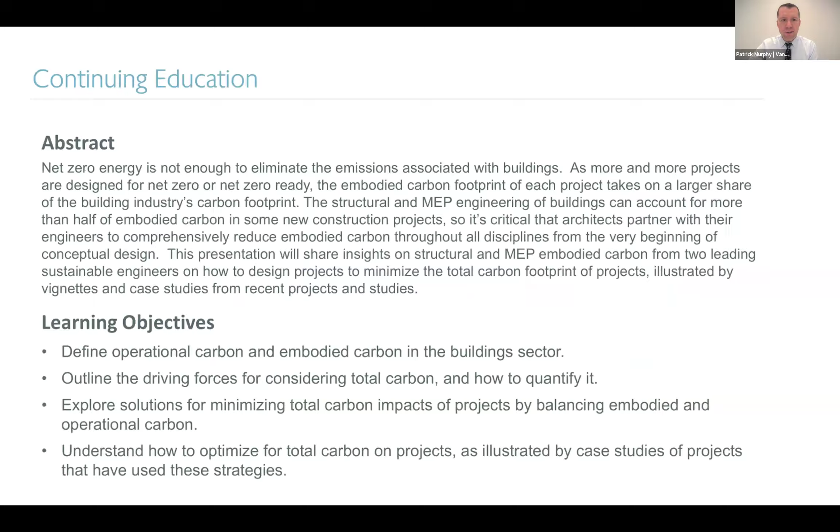Today we'll go through very briefly. We trust this audience is a well-informed group of people around carbon in the built environment, but we'll hit on some highlights, especially as it relates to the way that engineers think about it. Then we'll spend time going through case studies and peeling out lessons learned, both from Suzanne's practice and ours, and then also bringing that together in our collaborative work together. Then we'll leave you with some key takeaways for things you can be doing on your projects now to advance the practice.

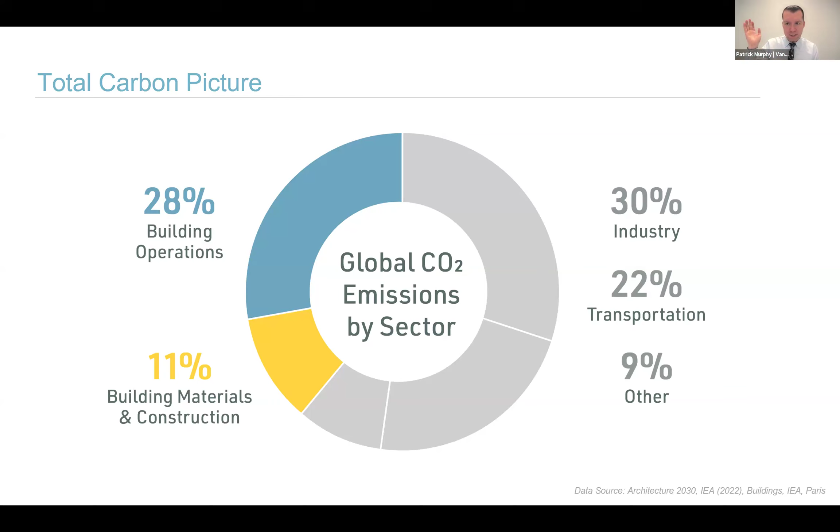So first, carbon in the built environment. It will surprise no one on this call that buildings are responsible for 40+% of global emissions, and of that we see about 3/4 of those emissions are associated with building operations, and about 1/4 are attributable to the construction process and the materials procurement and manufacturing process. What that tells us is when we're only renovating or building maybe 1 or 2% of the square footage in a city or the world any given year, there's a really disproportionate impact around the embodied carbon of projects compared

to the 20, 40, 60+ years of operation of those buildings. So when we're talking about the carbon footprint of a project, we really need to widen the aperture. We've spent many years, especially in Massachusetts, focusing on getting to net zero energy, getting to a real focus on operational carbon to zero. But when we look also at the embodied carbon of these buildings, we need to look at the totality of operational and embodied carbon for that total carbon footprint. Sometimes we may be investing more embodied carbon to save operational carbon, and we need to be looking at that in a really strategic way to make sure we're making the right choices on our projects.

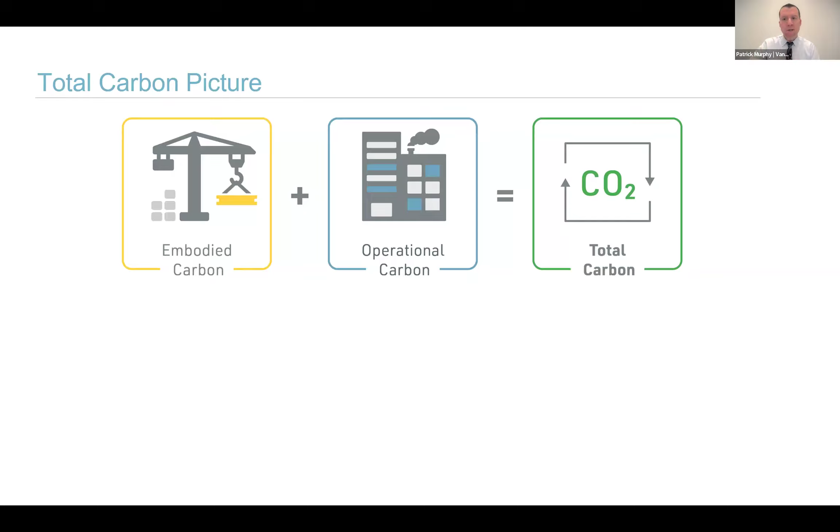It's similar to, I'm sure a lot of you have been through, projects with life cycle cost analyses, where you're investing more dollars upfront for, say, an energy savings measure, like triple pane glazing instead of double pane glazing, in order to save operational costs down the road. There's theoretically a payback for that upfront cost investment. The owner wants to see that they are seeing return on their money. You can think of a similar approach with carbon.

You're maybe investing more embodied carbon upfront to save operational carbon down the road. Is there a carbon payback? Is that carbon payback quick enough? The teaser I will say is every pound of carbon we are putting in the atmosphere right now is a big deal. So if your carbon payback is longer than a couple of years, it might not be worth it. The time value of carbon is a real big issue, but this is changing the way that we're thinking about total informed integrated design, and we're trying to move this to the beginning of projects to make informed design decisions while we still have that opportunity.

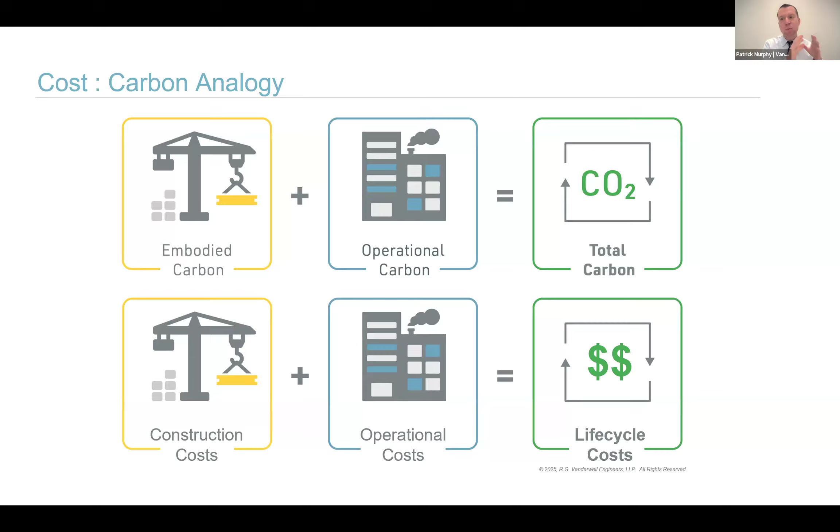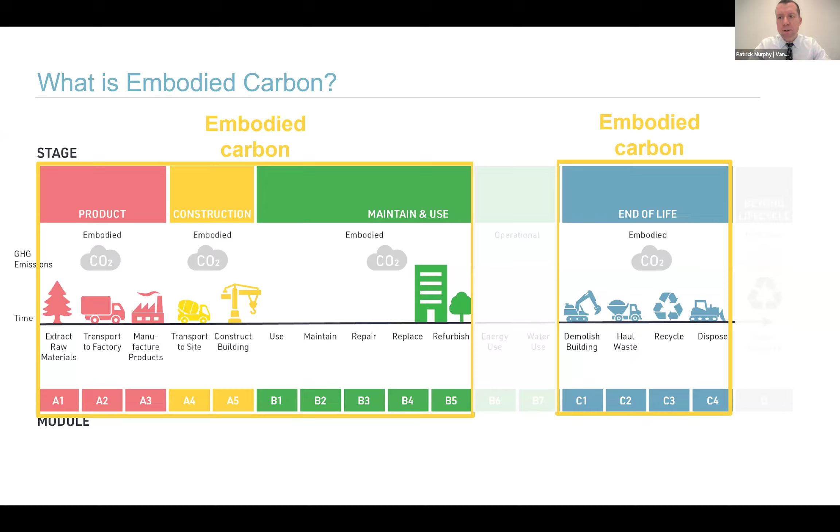So the total carbon life cycle of a project, you've seen the chart before. Embodied carbon covers most of the categories around this, and of that, roughly 90% of what we know about embodied carbon is really happening in the A1 through A3 categories, the material selection and transportation to the site, and also the construction in A4 and A5. Operational carbon is just like one or two relatively small slivers of this project, but it's still a quite large footprint of the total carbon footprint of the project.

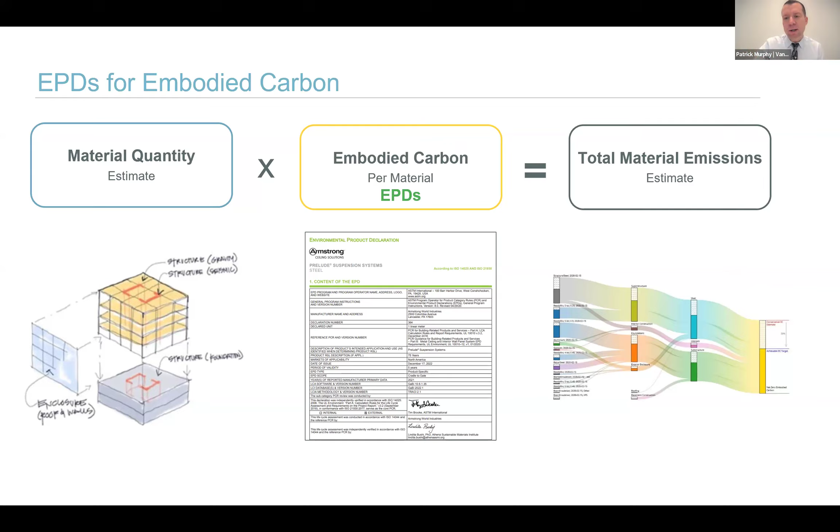The way that we get to these quantities is just like doing a cost estimate. So you'll see that cost and carbon analogy coming through, where you're doing a material quantity estimate and comparing that to the embodied carbon of that material. Many architectural materials fortunately have environmental product declarations. Speaking as an engineer, those are few and far between for us, so we have other methodologies to translate material quantities into the embodied carbon footprint of a material.

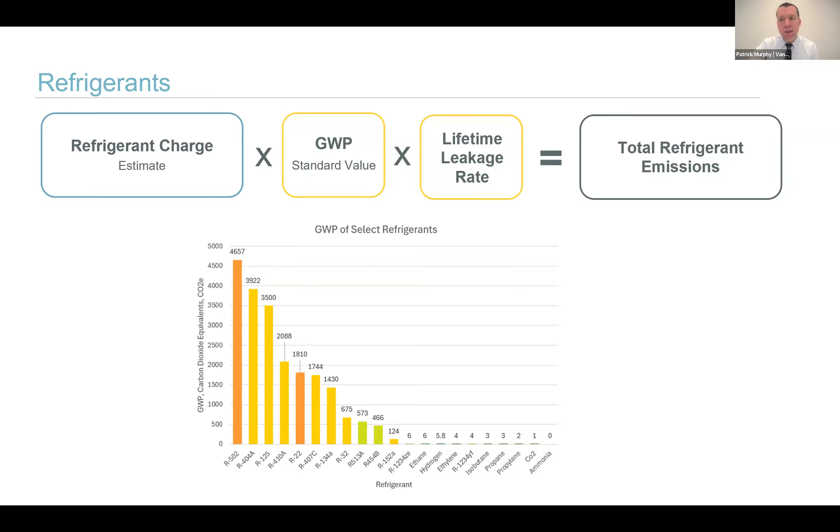Especially speaking as a mechanical engineer, the refrigerants we deploy in a lot of our heat pump systems, as part of our electrification strategies, have a disproportionate global warming impact equivalent to embodied carbon. The way we figure that out is the amount of refrigerant in the system multiplied by the global warming potential of that refrigerant. Global warming potential means if you were to release a pound of that refrigerant into the atmosphere, what's the equivalent of releasing CO2? Many refrigerants that are fortunately being phased out have the equivalent of thousands of pounds of CO2 emitted for every pound of refrigerant leaked. So how much leakage you have and the refrigerant selection are big deals. Thankfully we're seeing a phase out of these highest GWP refrigerants, but they're still a disproportionately high contributor to MEP embodied carbon.

When we think about the operational carbon footprint of a project, there are several components we need to look at simultaneously. There's the site combustion, the scope 1 emissions—are we burning a fuel in the building or at the site to heat the building, for example? A lot of our goals are to eliminate that altogether or as dramatically as possible. Then you have emissions associated with the electricity grid. It's a mixture of hydropower from Canada, offshore wind power, solar from down the block, but also the natural gas or coal burning power plant across town or across the state producing that electricity. There's a carbon footprint for every kWh you're consuming. You can deduct your clean power generated on site or procured directly offsite, as long as you're retaining those renewable energy credits, and that gets you your net operational emissions.

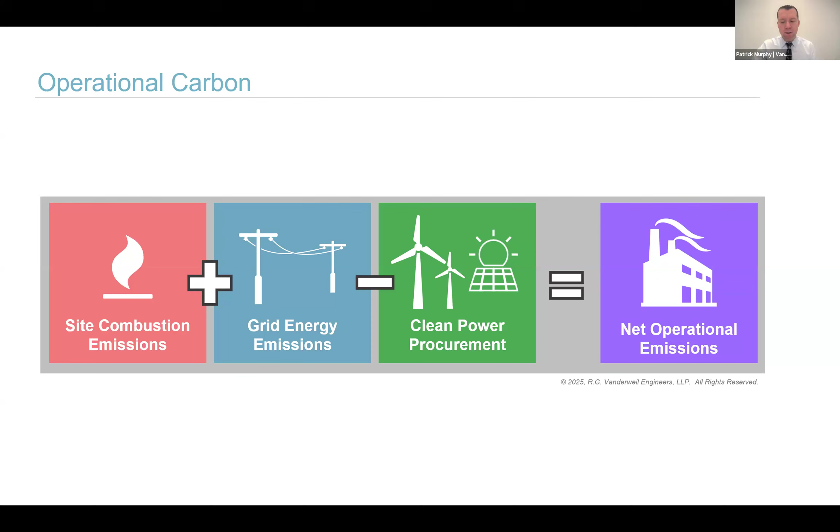I also think it's important to understand the why of why we're learning about embodied carbon, as this is becoming more of an entry point. In one of the presentations I did earlier this year, where we're educating more engineers across the field, some of them don't really have climate change on their radar, which is also sometimes the case with some of our audiences too. But it's important to know that it's coming—it's in our regulations, codes, the green building rating systems, and so on.

Often the embodied carbon policy shows up in two different formats. One is embodied carbon reporting—this is where we're measuring the LCA. Often we're just asked to report it; that's the entry point, and then later reducing it, usually around a baseline or potentially a benchmark. The easiest entry point is the Buy Clean program, similar to what we'd seen on the operational side with utility incentives for a high efficiency pump or other new technology. So this is where we're specifying lower carbon materials, often identified through EPDs. In Massachusetts, the Building Stretch Energy Code already has a quasi buy clean program with low GWP concrete incentivized in one of the compliance paths. Cambridge and Boston already have requirements for measuring the LCA, the embodied carbon reporting, for the structure and envelope, usually for buildings over 50,000 square feet.

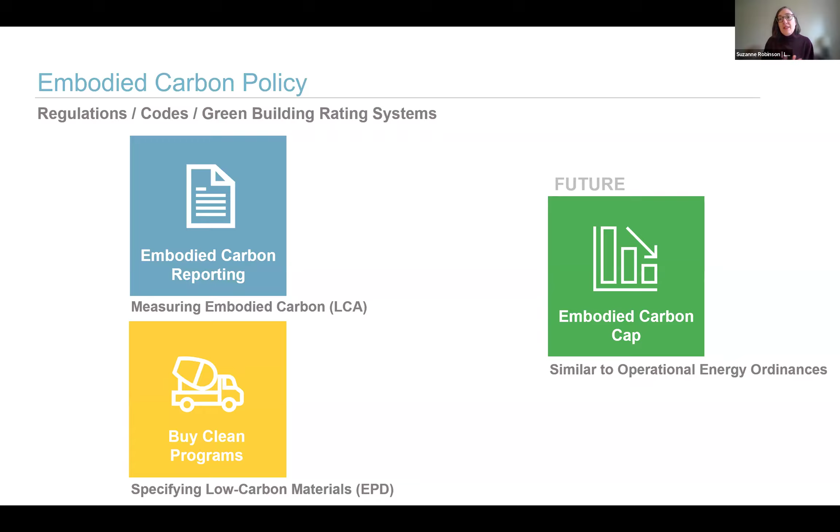On the horizon, we have the state. Massachusetts put together an embodied carbon intergovernmental coordinating council to make recommendations to integrate embodied carbon reductions into the state building code, so we'll potentially see some of that in the near future. I was involved in some low carbon concrete recommendations for buy clean programs, so we'll see what makes it to the entry point there. Eventually what we'll see in the future is embodied carbon caps. We're already starting to see some countries in Europe limit embodied carbon values, similar to what we've already experienced with operational carbon, with building energy ordinances that limit the amount of operational carbon a building can have. It's not a percent better anymore—it's just a cap.

So what we'll do is go through 4 case studies. I have 2 and Patrick has 2. We're very democratic in here.

Before I jump into that, I want to talk about embodied carbon reductions for structural opportunities. The engineer in me likes to think in buckets. As we saw in the earlier slide, material quantity times the environmental impact of a material gives you that embodied carbon.

So two strategies on the material quantity side: we want to reduce material quantities. That can be done through what the architect designs and also through decisions the structural engineer makes in their design work.

The other two buckets are about material selection. You can either specify a lower carbon material—often by improving materials already in use, such as lower carbon concrete or lower carbon steel—or use alternative building materials, designing with non-conventional materials that have been around for quite a while, usually bio-based materials like mass timber, which I'll talk about.

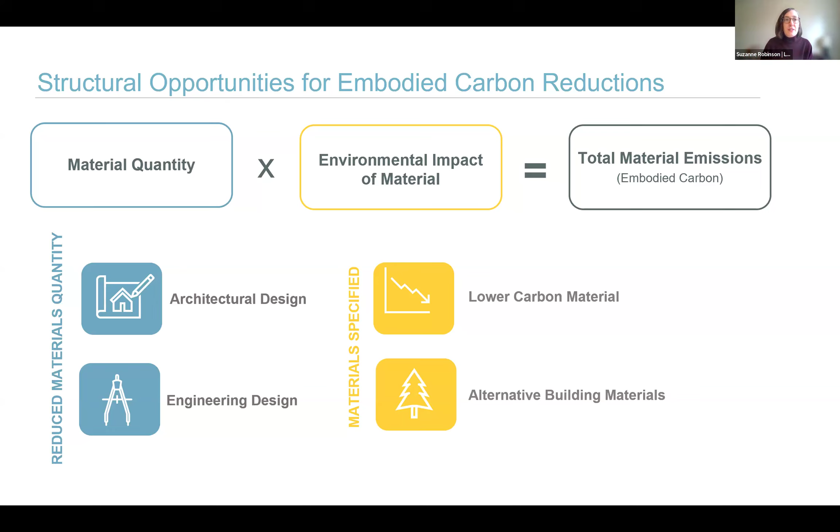Jumping into the first case study, this is the Duan Family Center for Computing and Data Sciences at Boston University.

This project was awarded to KPMB way back in 2013. I'm noting the date because embodied carbon wasn't really on our radar back then, over a decade ago, like it is today.

In 2017, BU's Climate Action Plan went into effect, and the first 3 goals in that are: prepare for climate change, net zero direct emissions by 2040, and act on indirect emissions—so embodied carbon.

In 2018, after the project was put on hold, the design team was asked to meet these goals as best we could, mainly focused on being a very monumental fossil fuel-free building.

The project team was also asked in 2019 to bump up to LEED Platinum. It was an interesting exercise because that's when the team had to go back to the drawing board and look at more credits to reach Platinum.

There was a whole process of looking at the building life cycle impact reduction credit, which was explored, and through that we reviewed the concrete design.

We were able to develop several strategies, some of which included increasing the SCM, the supplementary cementitious material. This was back when GWP wasn't as much in the forefront for this.

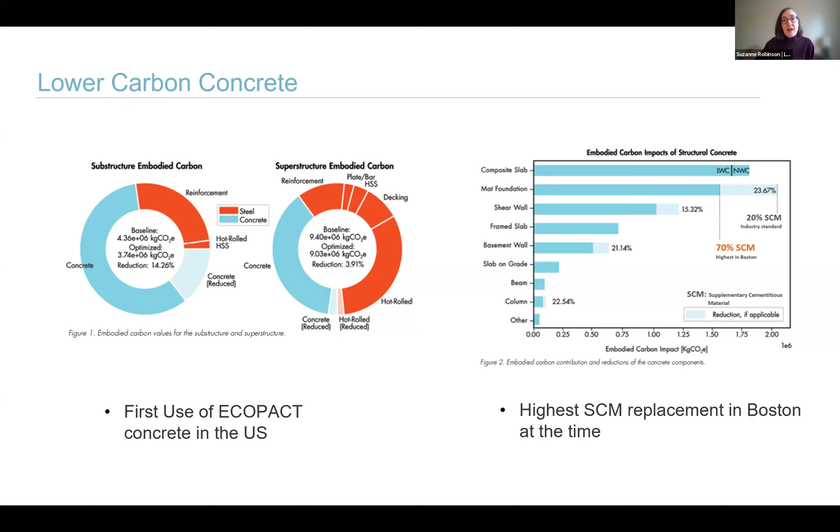Before the next case study, I wanted to touch on a concept: gravity path, which architects have all taken in structures classes—often an early class for most programs, so hard to digest all of it. But one really important thing is understanding that the simplest gravity path has structural columns all aligning and going straight down, bringing the load straight down to the foundation, nice and simple.

That's the least amount of material. Anytime the gravity path has to travel farther—usually through cantilevers or column transfers—we end up needing a lot more material to support that path.

This project, the data center, is a great example of a building form expressed through cantilevers and open spaces, which required column transfers. On the base level was a vertical piazza staircase for congregating that needed a wide open space, so we ended up with a lot more embodied carbon as a result.

I mention this to share that although it's beautiful, it's a design form from an earlier era. Now that we're more aware of embodied carbon in structure, this was back when that wasn't such a significant factor in the sustainable design approach.

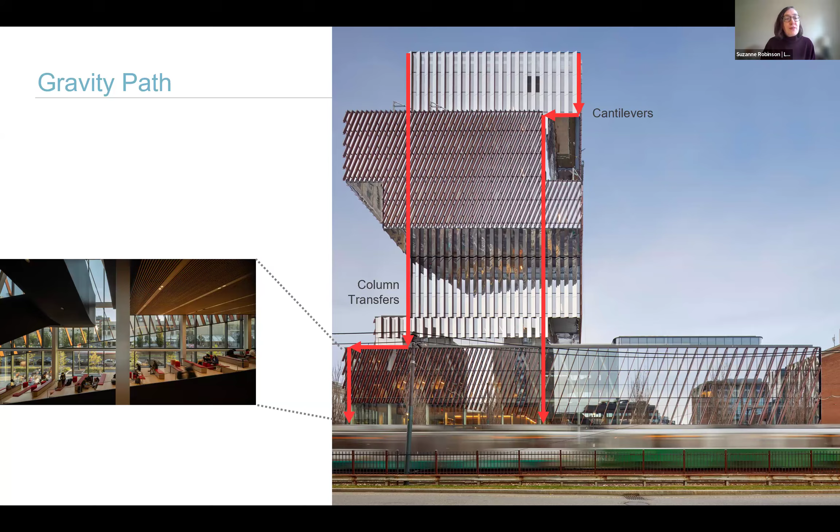For the next project, the Pardee School of Global Studies is a great example because it shows the evolution of how to design buildings that push limits, not just in operational carbon but also embodied carbon, moving towards meeting Boston University's evolving climate goals.

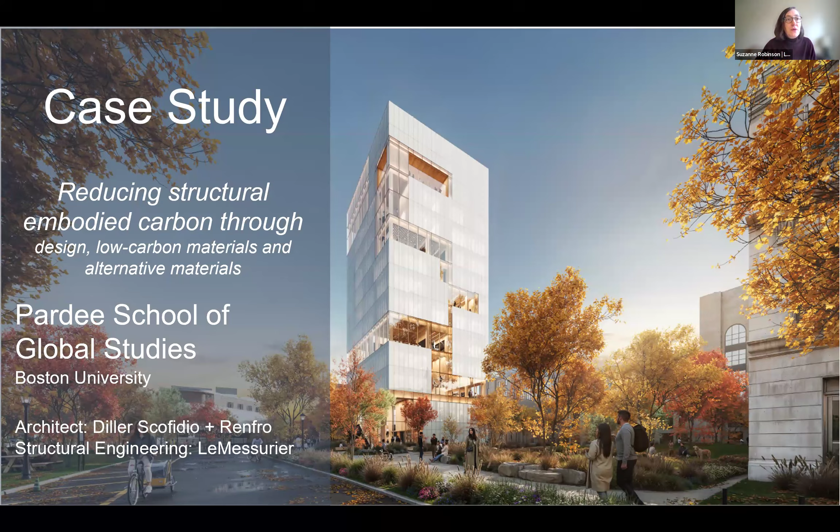This project went through several design iterations. It was designed partly through the COVID pandemic, and as prices drastically increased due to material shortages, we had to redesign as a team while maintaining the integrity of the vision, still keeping those internal neighborhoods that were part of the design vision and the concrete core.

What's interesting is this project didn't start with the structural materials it ended up with. It started with structural steel mega corner columns. As we simplified the design to meet budget, we introduced a new material, finding a new way to express the design vision through mass timber. I always recommend if you're going to design with mass timber, start with it, don't introduce it partway through. This was an integrated design approach, holistically finding something to meet the vision while meeting all other requirements.

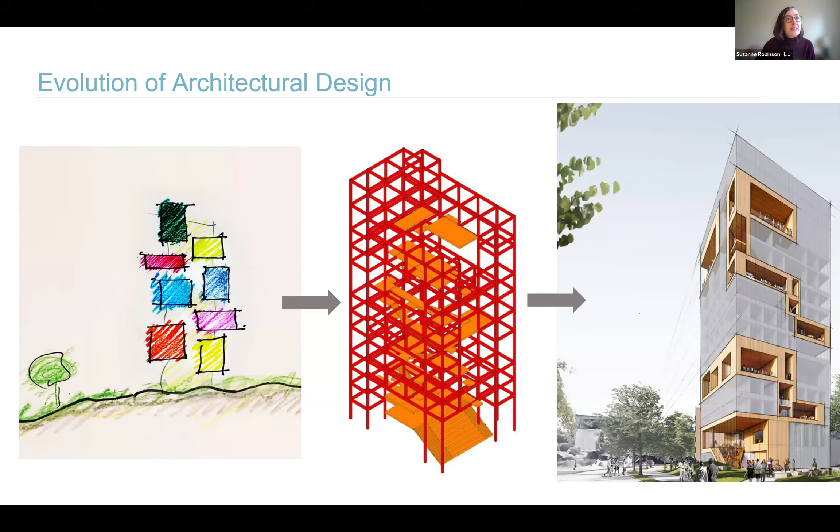Looking at the initial design, we were only hitting about a 2% reduction in embodied carbon for the structure. This was partly because we didn't have as much concrete in this building as we did with the data center, due to the project's design.

By adding mass timber as an option along with lower carbon concrete, we get a 31% reduction. Often people are surprised, they think that percentage should be a lot larger.

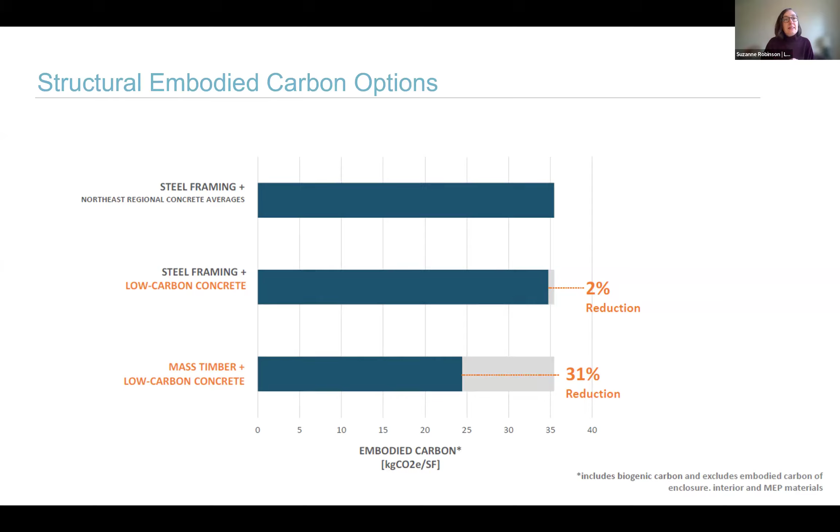My last point for this case study: if you take away foundations and only look at the superstructure, you're actually seeing a 54% reduction. So you're really starting to see mass timber pulling its weight with embodied carbon.

If you just look at the gravity system, which the mass timber is, it's an 87% reduction. But it's really important not to separate gravity system to gravity system, one-for-one comparison, because you can't do that. You need to be holistic.

For instance, when comparing material differences, steel to mass timber, in our LCA we include the acoustic buildup needed to meet acoustic requirements for mass timber, which we didn't necessarily need in our previous design with concrete, which inherently has better acoustic performance.

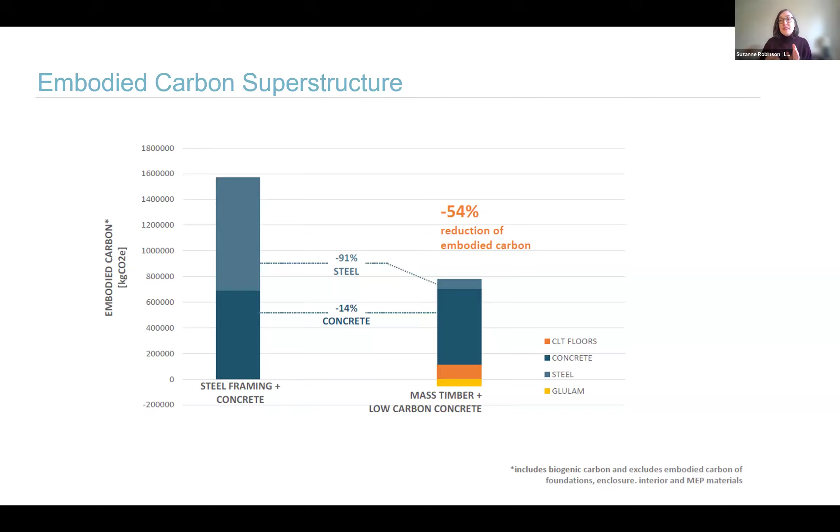Another example is facades. Often people try to choose the lowest embodied carbon facade system without considering the structural system that has to support it - the weight of the facade, the tolerance of deflection. Those can really bump up the structural system's carbon. We need to look holistically, everybody's part of the design as we figure out embodied carbon.

I have 10 seconds, so I'll add one last thing - not structural, but a great story. Because we simplified the facade system in this iterative design process, we were able to afford a triple glazed enclosure system, whereas before, when the enclosure was more expressive on the facade treatment, we couldn't afford triple glazing. So it's about figuring out which design moments to prioritize and where to spend the financial budget and the carbon budget.

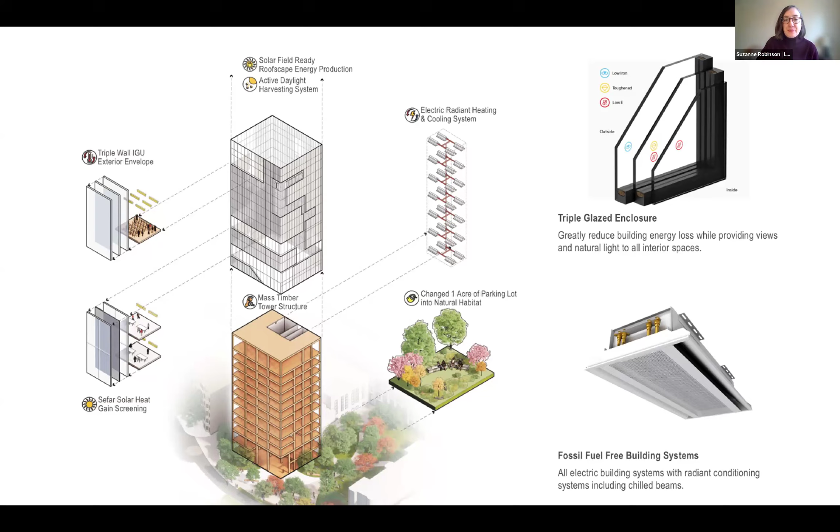Our next case study was the recladding of Gund Hall, the Graduate School of Design at Harvard University, where we partnered with Bruner/Cott as the energy consultants, and MEP, to understand what the implications of different envelope strategies would be on the overall project.

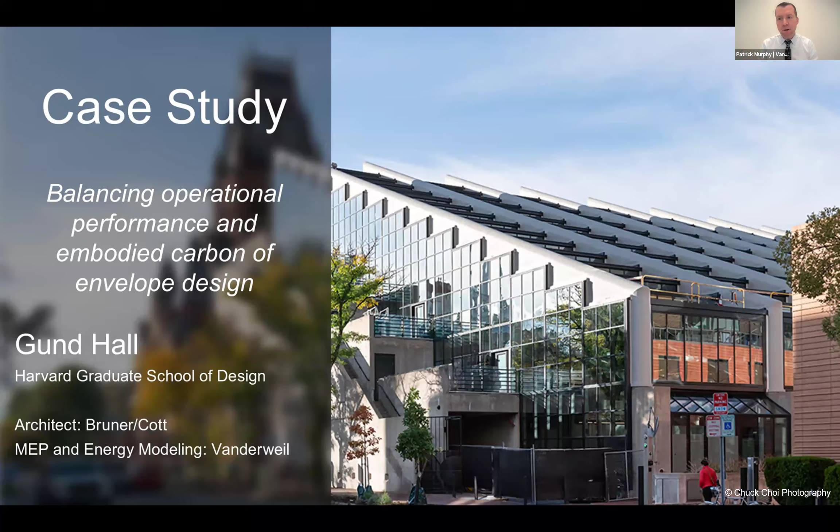We were helping in an initial study to scope the project and then track performance throughout design and construction, to ultimately address environmental issues with leaking roofs and daylight issues in the space, but also reduce the energy and operational carbon footprint in alignment with Harvard's goals.

The scope of the project ended up utilizing a hybrid VIG, new curtain wall system and glazing for the studio space, compared to the existing structure, which is a large concrete brutalist, early brutalist structure. The scope of our project was a small percentage of the overall embodied carbon of the project. This was not to say that we would have ever demolished and rebuilt the building, but where we're finding value in these historic structures.

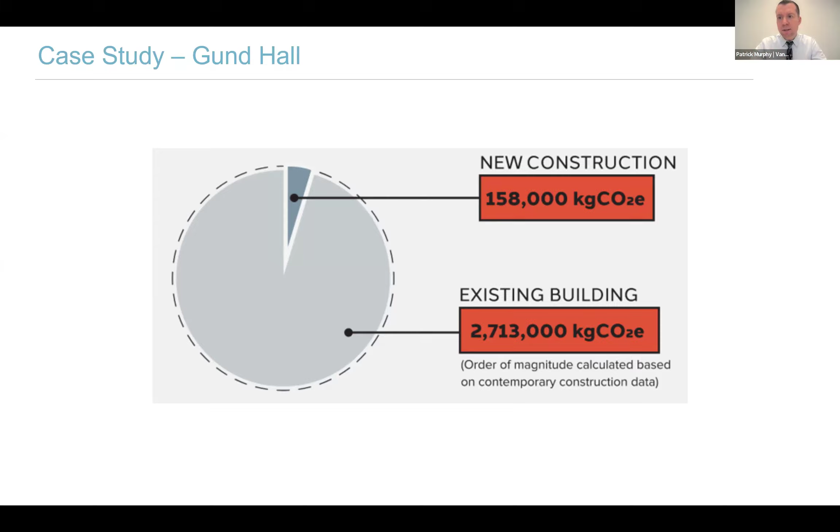We're trying to make them adaptive to the current approaches to design, both in terms of operational performance, but also now in terms of investing our carbon wisely. We wanted to understand what that scope was. So we invested about 160 metric tons of CO2 in embodied carbon in a new facade system for the studio.

We compared that to the operational savings of the different options we considered. Initially, when this project started in the study phase, this was prior to the Massachusetts Stretch Code updates, prior even to the drafting of the Massachusetts Stretch Code back in 2022 and 2023. Initially, the goal was to use a high performance but still double pane glazing system.

When the Massachusetts stretch codes came out, this project would now be subject to the stretch code, which used to not include existing buildings. Then in 2023, it did apply to existing buildings, and we had to demonstrate compliance prescriptively with that new code. The performance values for the facade were about 20% more stringent than the previous version of the code.

That tilted us towards maybe triple pane, or we looked at this hybrid VIG system as well. We also looked at applying insulation in other places, and a couple of other strategies, including improvement in lighting and lighting controls, to get overall performance of about 25% reduction in operational emissions.

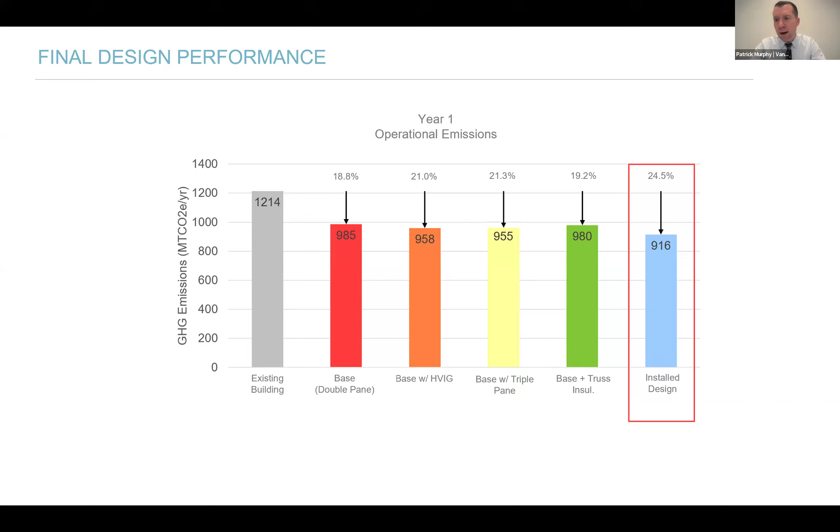That's compared to 3 years of meter data. We calibrated an energy model, so we're really trying to be accurate to the real world operation of this building. So we're saving roughly 300 metric tons a year of operational carbon.

When we plot that out over time, over 30 years, we're seeing, compared to not doing anything, a business as usual case versus the ultimately installed solution, about 8,200 metric tons of CO2 saved. That's equivalent to the CO2 that could be absorbed by a forest, like 2 times the size of Harvard's campus.

So substantial operational savings, but we wanted to look holistically at the investment in the upfront carbon of the project. Fascinatingly, it was the fastest carbon payback we've ever seen in any of our carbon payback analyses. It was under a year.

That upfront investment in embodied carbon of roughly just shy of 160 metric tons of CO2, compared to the significant operational energy savings of that facade, really, it was a slam dunk to make the carbon investment to improve that facade. Now, why was it the fastest we've ever seen?

I think we're limiting the scope to basically the Achilles heel, from an energy perspective, of Gund Hall. Really, it was the studio enclosure that was leaking, both literally and figuratively, a lot of energy. We were also addressing a relatively high energy, inefficient building before, which had been served with steam, a more carbon intensive source of heat.

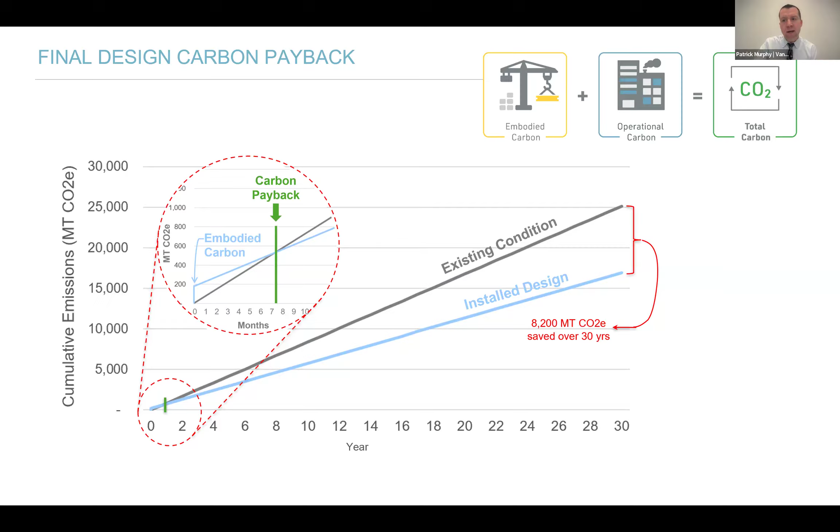And so we really did see that peak load reduction, that heating load reduction, and the reduction in carbon intensive energy. All of that, compared to this relatively tailored scope that we ended up with for the facade, really made the approach worth it.

Our next case study is a more holistic approach focused on the MEP systems approach to total carbon. This is a teaching laboratory that we worked on with Payette. This project, when it was initially designed in 2018-19, had the goal of being all electric, no fossil fuel at all, reflecting the ambitious, progressive designs of that era, only 5 to 6 years ago.

What we found at the end of the schematic design phase was that we were having a budget problem. When we dove into why that was, it turned out that the electrical infrastructure costs were a disproportionately high contributor to the costs being high on the project. So we looked at what other ways we could achieve the operational emissions reduction goal, but also meet the project budget. Otherwise, we wouldn't have a project.

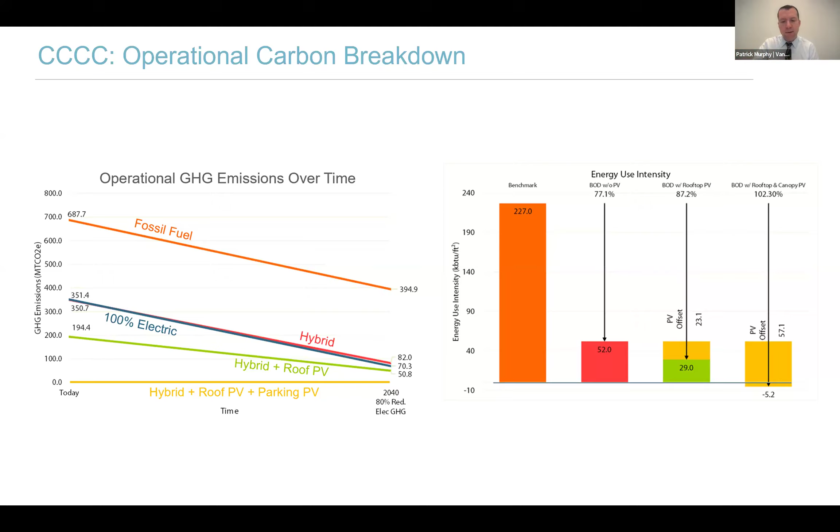But the embodied carbon of the MEP systems was substantial. Compared to the code baseline approach—maybe an all-air system instead of a hydronic system like we had, using gas boilers as a heat source, an air-cooled chiller, or a DX air handling unit—the MEP embodied carbon footprint of that baseline compared to our proposed solutions shows a big jump.

Really the biggest jump is in this purple category, which is refrigerants. I talked about refrigerants at the beginning as having a disproportionate impact on the embodied carbon of MEP systems. When we electrify, especially since it's still best practice and the Massachusetts stretch code pushes design teams toward electrifying via heat pumps—which are refrigerant-based systems—there's a carbon footprint for that.

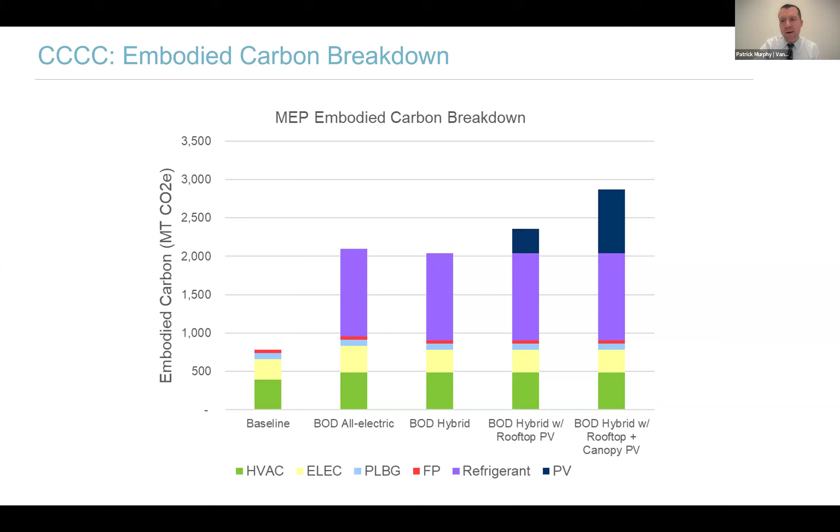We saw the difference between the all-electric and the hybrid systems was negligible from an MEP embodied carbon perspective. When we added the PV, you see the dark blue on the two bars on the right—now we're adding a lot more embodied carbon. So the question was: are we doing the right thing here to get to net zero operational carbon by adding all this embodied carbon?

Fascinatingly, the time value of carbon—the payback of all these options—ended up being about 3 years, which was on the early side of the analyses we've done. We typically see more like 5-year to 6-year carbon paybacks.

Now I'll reiterate the point I made at the beginning. I just showed you a case study where the carbon payback was under a year; here it's about 3 years. Quite frankly, if your carbon payback analysis comes out longer than, say, 5 years, you should really question why you're investing that embodied carbon—because putting that carbon in the atmosphere now to save operational carbon down the road, when we have a carbon problem right now, is there a better use of that upfront carbon? We need to focus on both reducing embodied carbon upfront and pursuing operational carbon savings down the road.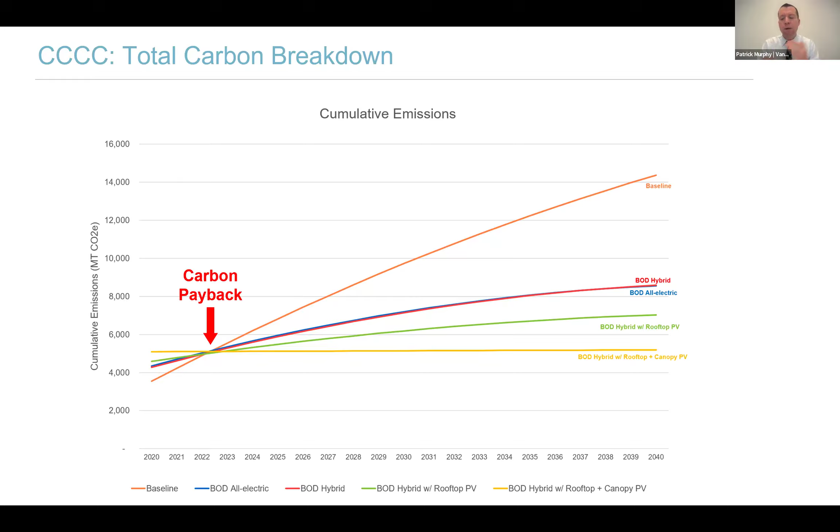So what would we do differently on this project to reduce that dramatic increase in embodied carbon for MEP systems? First, credit to the structural engineer and architect—they had already been well on their way to reducing the embodied carbon of the enclosure, the structure, and other site features. That included a cross-laminated timber roof canopy structure, stone gabion walls instead of concrete retaining walls, and lower embodied carbon cement.

So you see that when we add together the interior structure and envelope with the MEP embodied carbon, from the baseline to the first all-electric option, those non-MEP categories go down—but we've invested a lot more embodied carbon for MEP.

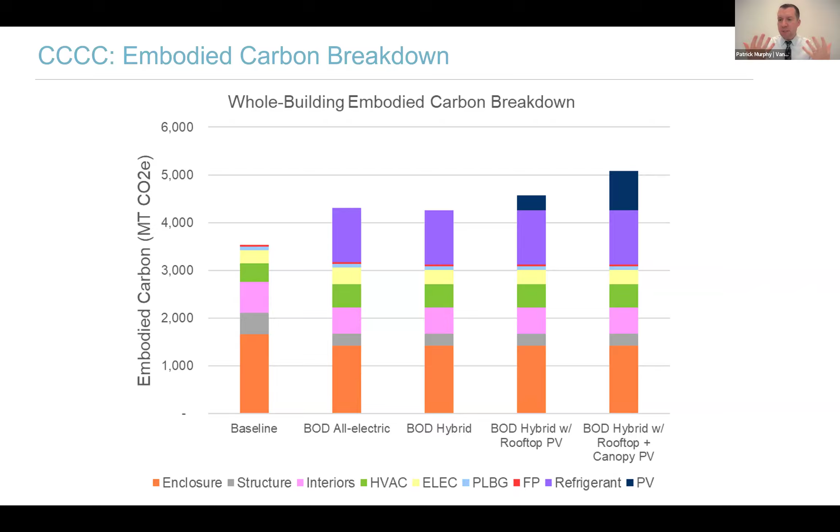What would we do beyond that now? All these disciplines have to work together to look at the total carbon footprint of a project. That's part of the story.

The lesson out of that for us, for MEP engineers, was it's the refrigerant. This was a selection for a heat pump back in 2019 or so. Now we have the availability of new lower global warming potential refrigerants for our selections, and that alone could make the total design roughly comparable to the baseline in terms of embodied carbon invested, until you add that offsite solution or the canopy PV in the parking lot.

So by looking holistically as a team, structural, architectural, and MEP, at the total carbon footprint, if you're going to make investments in additional embodied carbon, make sure you're doing it for the purposes of operational carbon savings. That would be an appropriate investment of embodied carbon in my view.

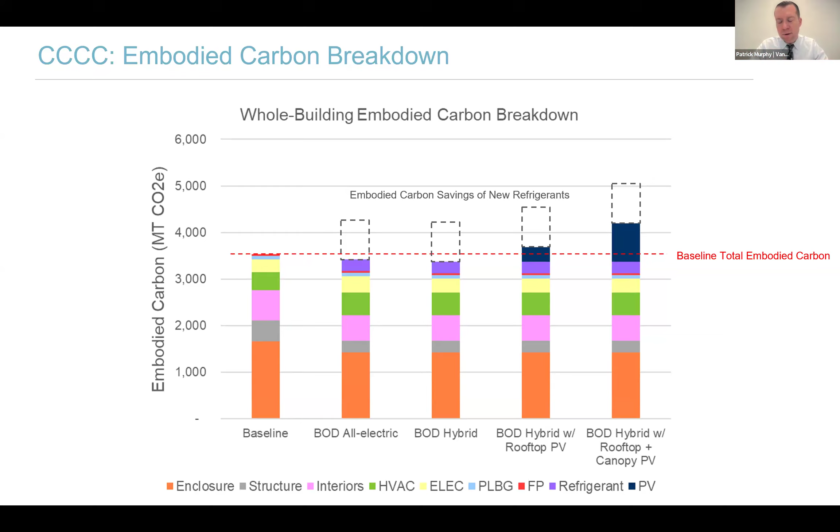Let's bring it all together. So we're talking as a team. What do we do as a team? The PV systems themselves are a great opportunity for an MEP engineer and a structural engineer to really partner on how you think about the total carbon footprint of these PV structures.

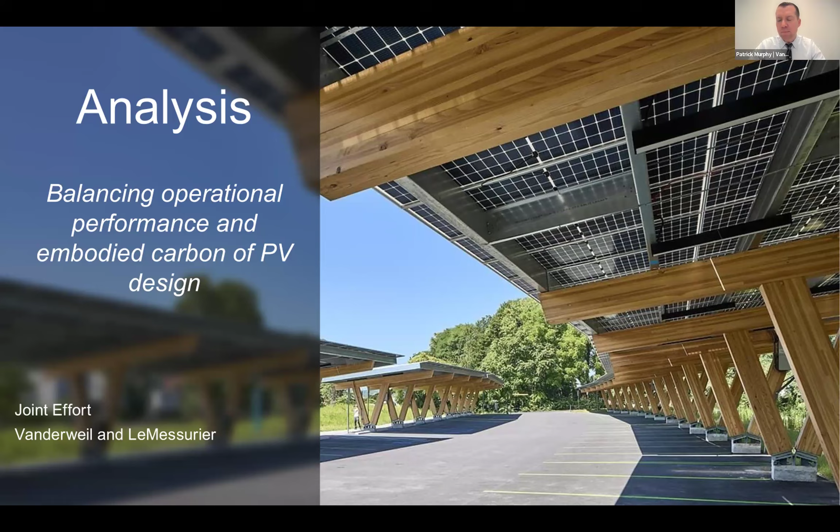From a more general perspective, let's talk through the PV embodied carbon footprint. We saw that in the blue bars in my last case study. The total PV carbon footprint of a traditional rooftop system - this is a 1 megawatt system, so these are numbers you can extrapolate or interpolate for your own project based on the size of your PV system. About three-quarters of that is related to the panels themselves.

The PV panels are a really carbon intensive product, and the remaining quarter is related to the mounting and to the electrical distribution supporting that. Now that's if you put the PV on the roof, but Suzanne will talk us through when you're building a canopy structure, whether it's above a roof to create a canopy on top of a roof, or to build a parking canopy.

In this study that we did, we as engineers are always like, too many variables, so we set it in Massachusetts. One of the things we're seeing with pretty much all the code requirements is that you have to design your roof to be able to have the strength to support PV systems. So we weren't counting that on the rooftop PV section.

For the canopy PV, the structure does include foundations, and it then includes the structural components that hold the PV system - in this case, structural steel - for things. And so this adds an additional 30% of embodied carbon that we should take a look at when we're looking holistically.

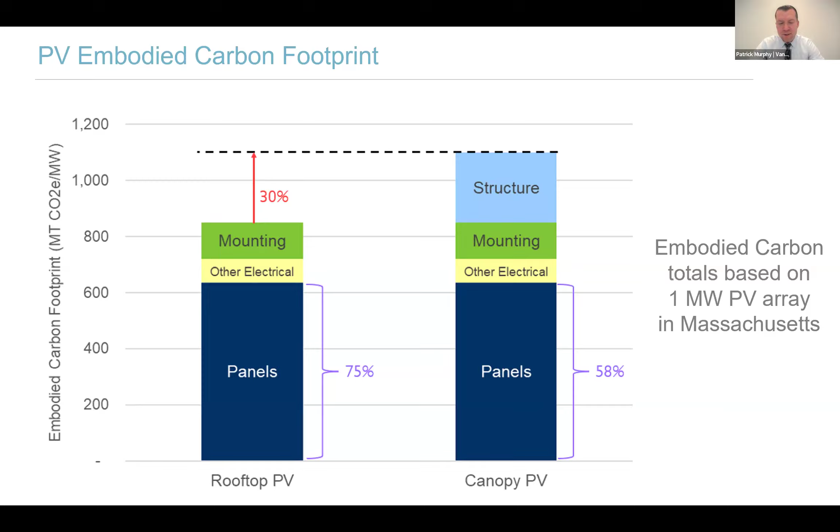So first reaction to this is: prioritize rooftop PV instead of canopy PV. If you're going to invest your carbon wisely, that should be obvious, but we want to put some numbers on it. So when we look at the time value of carbon, again these are numbers that are extrapolatable for a 1 megawatt system.

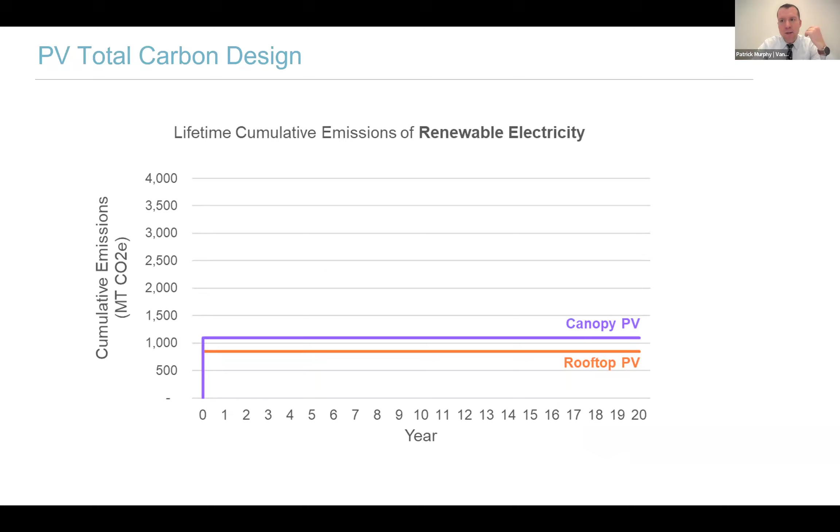You're making that upfront investment in embodied carbon for either a rooftop PV or a canopy PV structure, and we compare that to if you did not install the PV and you were consuming that electricity from the grid - again in Massachusetts - what does that look like? So that's no upfront embodied carbon investment, but cumulative over time consumption of grid electricity. The line curves a bit as we expect the grid to get cleaner.

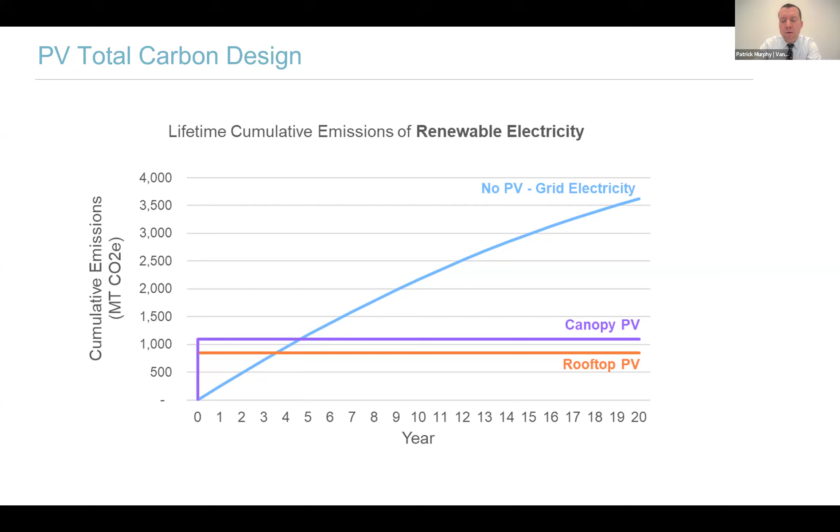And where those lines cross is your payback. We're seeing, roughly speaking, like a 3 to 5 year payback period. Now we're only looking at a 20-year lifespan - these systems could go 25, 30, it's going to depend on a number of factors.

But even under just a 20-year period, we're seeing that the upfront investment in embodied carbon for these PV systems will pay for itself 3 or 4 times over. So it makes a lot of sense in the long run, and it also has that relatively short upfront embodied carbon footprint investment.

So then we wanted to take it a step further. We really need to be pushing, doing better, not just accepting that 3 to 5 years is good enough for a carbon payback. And from an MEP perspective, one of the things we wanted to look at is that those PV panels are a really disproportionate contributor to the embodied carbon of these canopy systems or rooftop systems.

And so there are products available, even American-made ones, and especially thin film PV panels, that have somewhere in the range of 60 to 75% less embodied carbon in those panels than the traditional ones that you're procuring.

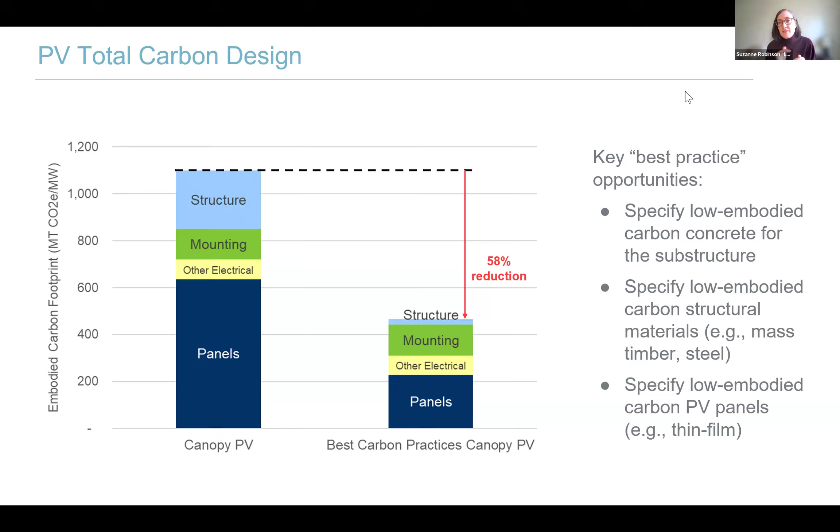And then on the structure, Suzanne had other thoughts. Yeah, so for structure, we can do the lower carbon concrete material, really push that down for foundations. And then for the superstructure components, looking at mass timber potentially, or steel - a lower carbon steel, which is more than just recycled steel, that's kind of business as usual - but something that really pushes that GWP down.

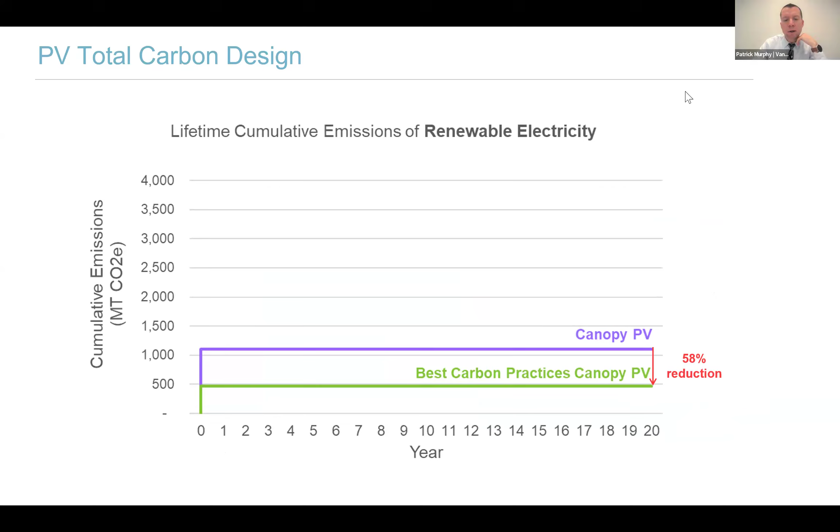Looking at the time value of carbon again, comparing the traditional canopy PV I showed you earlier versus this best practices approach to embodied carbon investment in PV canopies, versus the operational carbon consumption of the grid, we're seeing that carbon payback reduced by more than half. That carbon payback is now roughly 2 to 2.5 years for the optimized approach to total carbon for your PV canopies.

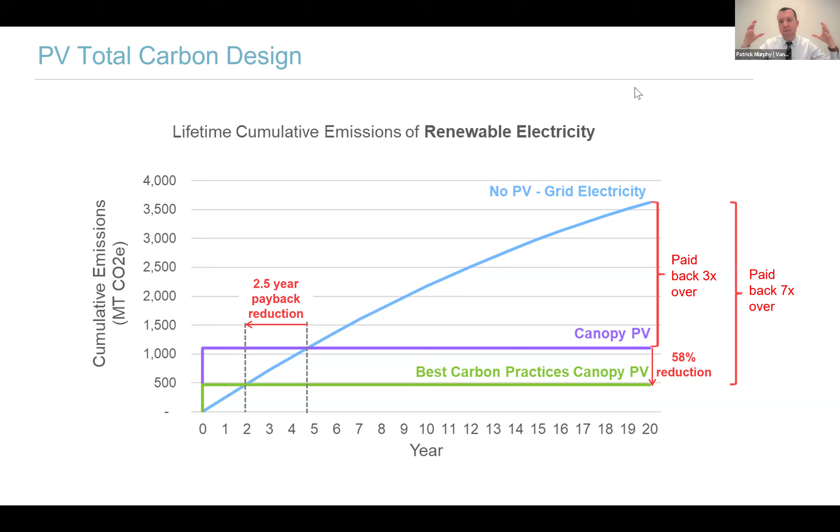So we can do better. We should be pushing to do better. And the carbon payback over time, instead of being 3 or 4 times, is now 7 times. The operational carbon savings of installing the system has paid for itself 7 times over instead of 3 or 4 times over.

So, key takeaways for you to take from our discussion today to your practice: really, we're emphasizing this holistic look. It's multidisciplinary, looking at all the carbons, operational and embodied, and making sure you're making strategic investments in embodied carbon that will yield operational carbon savings, reducing the total carbon footprint. When you work across disciplines, trading them against one another to offset the investment in additional embodied carbon—say, for your refrigerant and a heat pump—with structural embodied carbon savings, there can be a leveling of the total carbon you invest upfront while still recognizing long-term operational carbon savings.

Suzanne? You are muted. Of course, trying to be quiet over here.

So when we were discussing this presentation initially, one of the things that helps me is the guiding questions of what would the audience want, assuming mostly architects. What's the number one thing an architect can do that has the biggest impact? And then I was also thinking, what is it as engineers we get frustrated with architects about sometimes too? Part of that is really just being involved, working collaboratively, but from early stages—not just SD, but even pre-concept, when the image of the building is being imagined and presented to the client—it's really helpful to be part of that discussion.

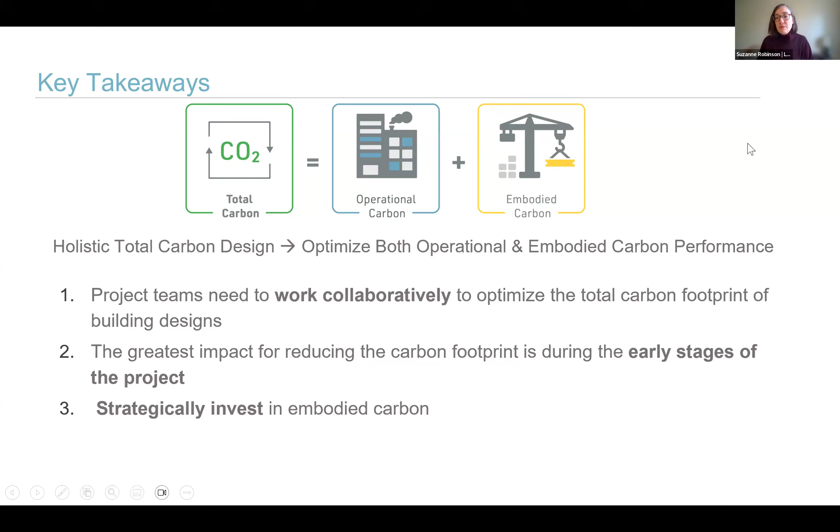And I think with that, I'll wrap it up so we have a little bit of time for Q&A. I saw some good questions in the chat already. All right, thanks, Suzanne and Patrick.

That was wonderful. I might love to kick off with a question if that's okay. Although I will acknowledge somebody named HRD mentions that you can consider rain screen facade PV as a dual purpose solution.